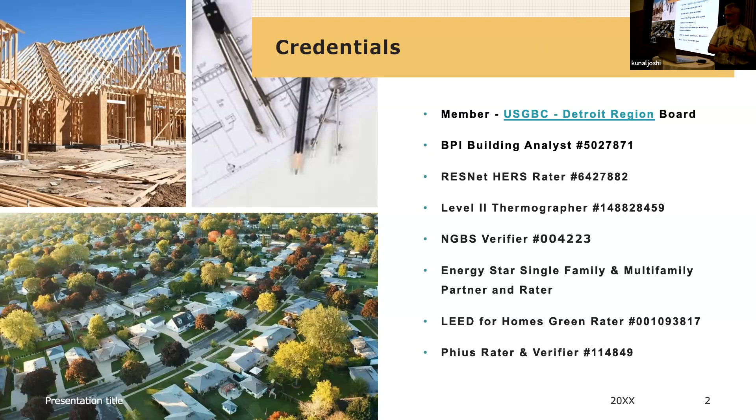All right, you're driving. Go ahead, go to the next slide.

Okay, so when it comes to energy efficiency in any building, buildings are always going to use the same amount of energy. It's just a question of how efficient the mechanical equipment is, but the energy demand is always the same in the building. There's two ways to reduce the actual energy demand in a building: air sealing and improving the insulation.

That's it. Okay. So the cheapest and most effective way to improve the energy efficiency is air seal, air seal, air seal. And if somebody tells you that you're going to make the building too tight, they don't know what they're talking about. After that, you improve the insulation, and sometimes tying the two together is the way. So you want to air seal around your insulation while you're installing or correcting things. Go ahead, go to the next slide.

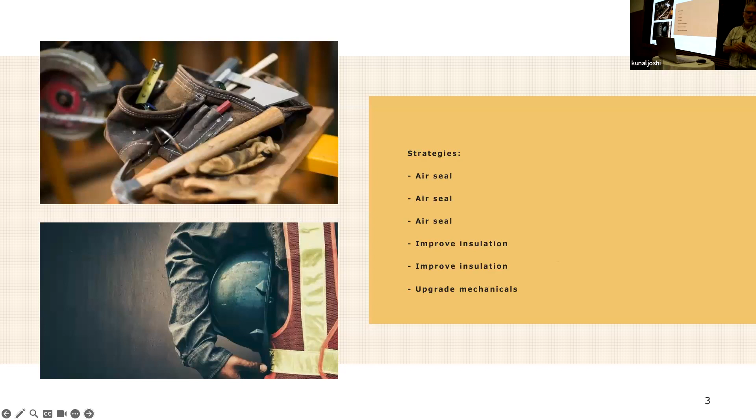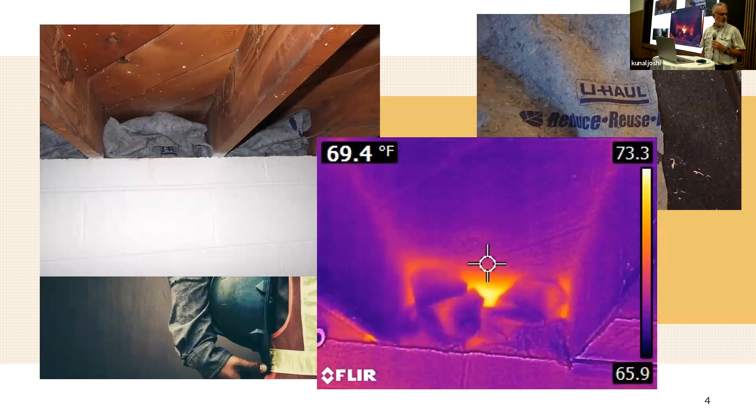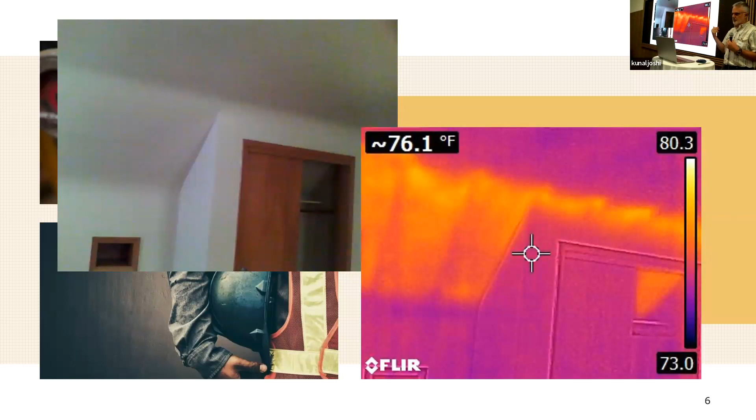So this is the sloped section of the ceiling that you see right next to that closet. The sun is beating down on that, and the insulation, because it is not installed correctly, is not doing the job that it's supposed to do. So you're going to get heat gain in that area specifically. Go ahead and go to the next slide.

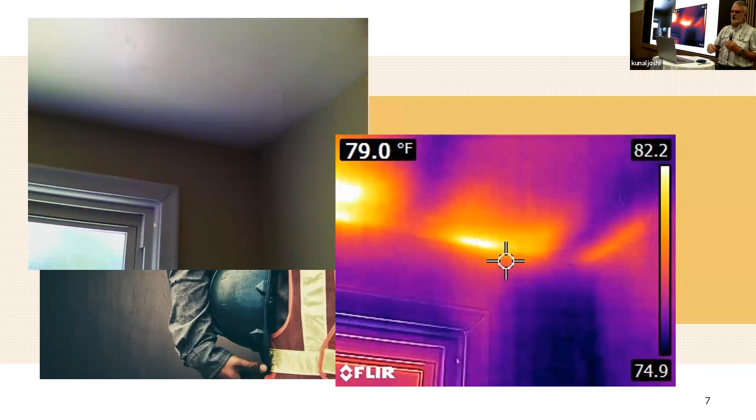And then this is a ceiling underneath conditioned space, but there is a porch roof that comes down. So we are getting air leakage in the thermal image. You can see the air leakage coming between the floor joists. So even though it's conditioned space above, you need to pay attention to what's outside. A lot of times when they frame roofs, they don't take care of the air sealing because they figure it's in an attic space. Next slide.

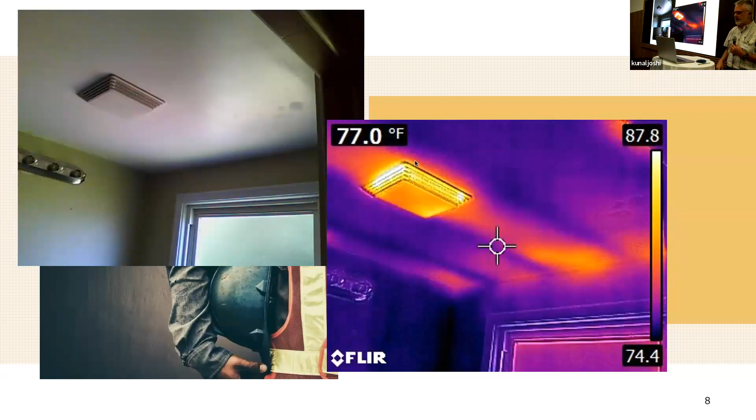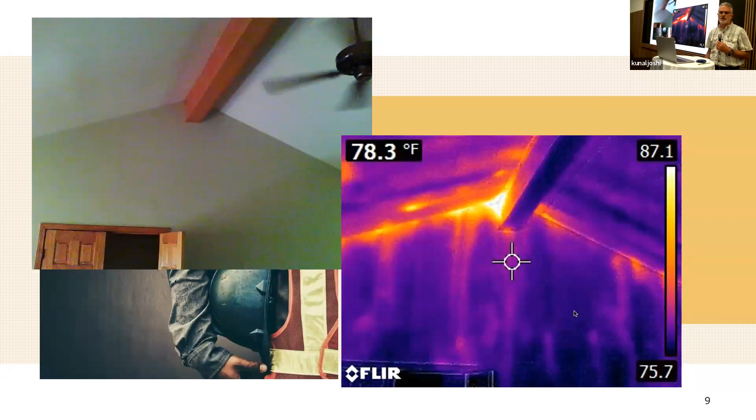And then this is air leakage. I have the blower door running here; that's what I would use to depressurize the house. When you're doing air leakage checks, you can use a box fan from Home Depot and just set it up in a door and seal around it. You don't need someone to come in with a fancy piece of equipment. All you need to do is move air out of a room or out of the house.

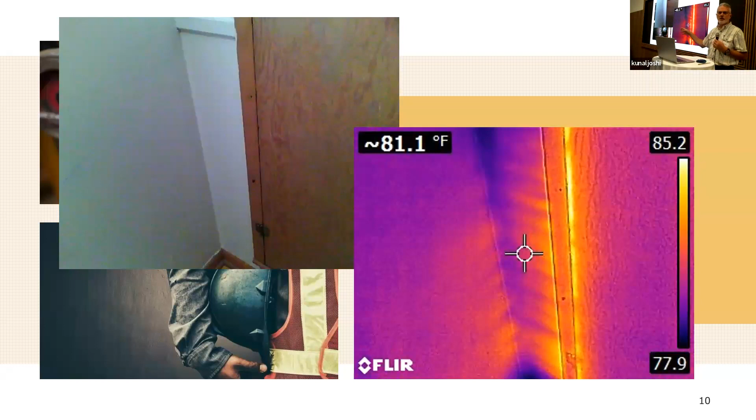So this is air leakage from an attic space through a door and around the trim. The wisp on the left-hand side is the air moving along the wall plane, and the bright light to the right of the trim is air leaking around the door and coming in. When we do a blower door test, we depressurize the house and simulate a 20-mile-an-hour wind on the house. Go ahead and next slide.

So the picture on the left is a dark paneling, but it is an interior door. In the thermal image, the dark purple right there is where the door latch catches. And so what's happening is when the wind blows on the house, or when I'm depressurizing with the fan, I'm drawing air through all of the interior walls, and it's coming out through that door. That's one of the last places that people think to look.

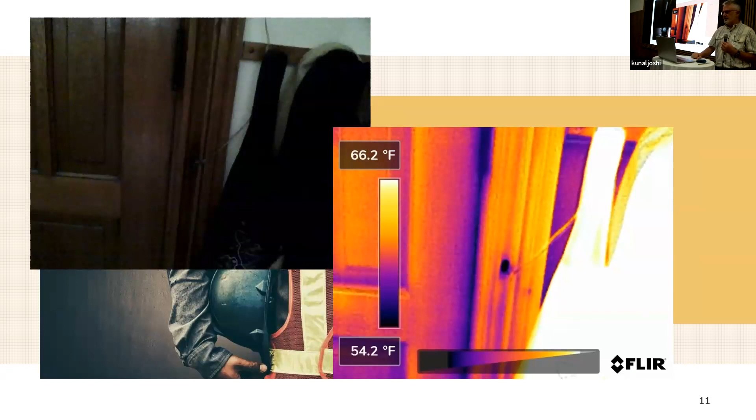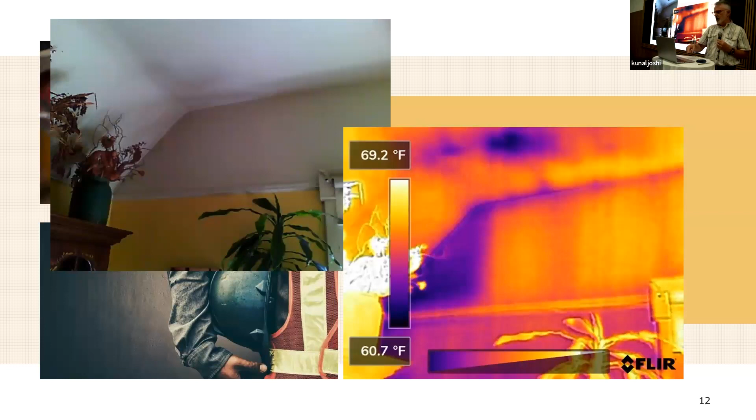Next slide, please. This is another knee wall. So you can see in the triangle on the left, we got a little slope ceiling over there. They 100% missed the insulation in that. Next slide.

And then this is another interior wall. We can see this is during the wintertime. We can see, on the lower right-hand side, a little cold wisp coming in. Again, I got the blower door running, but if the wind is blowing at 15 miles an hour or so, it's going to have the same effect on the house. So you need to pay attention to not only the exterior walls, but with air sealing you need to pay attention to your interior walls also. Next slide.

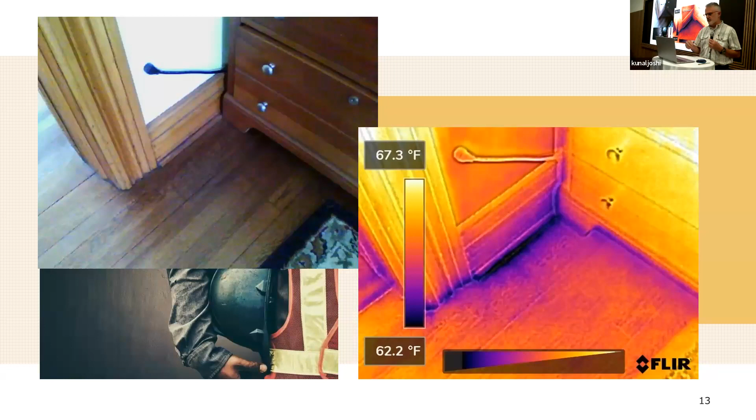And then this is underneath a windowsill. So painters, when they paint, they caulk the sides, but they never caulk the top and the bottom of the trim because you never see it. But this is air bleeding through underneath the window assembly and coming out behind the trim, the apron there.

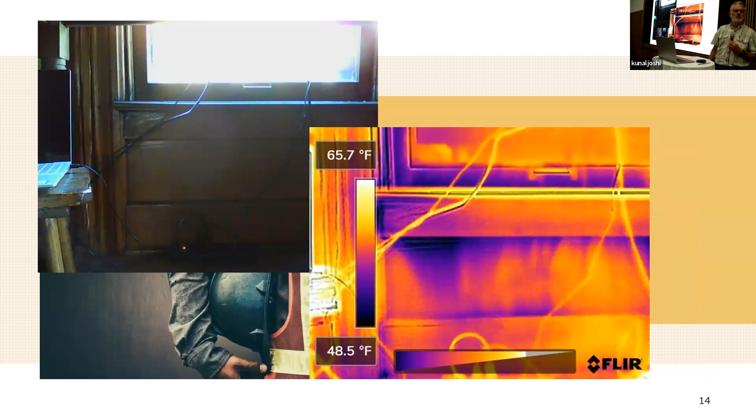How am I doing on time? Okay, next slide.

And then this is a sample. So once you get all your air sealing done and your insulation, all your upgrades done, that's the time to replace the mechanical equipment. Don't do it before. And this is a sample Manual J. I know it's kind of hard to see, but on the left-hand page there, that's a summary of what the house is going to use. And then down on the lower half of the left-hand page is a room-by-room breakdown, where it tells you how many BTUs each room needs, what the CFM should be, and so forth. And then on the right, it gives you a breakdown of your loads in the pie charts.

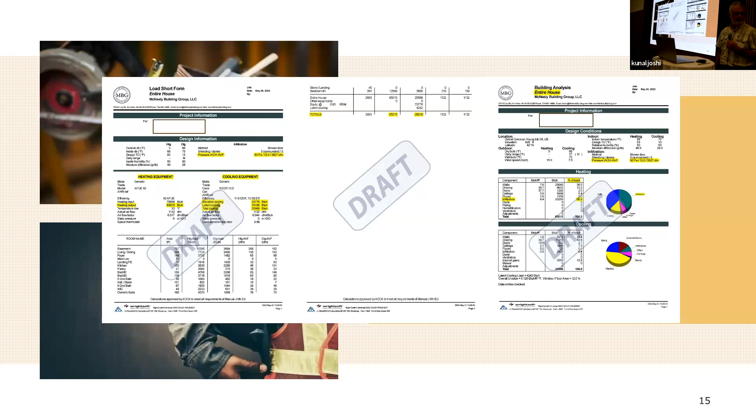This is required by code, but nobody ever does it. It's never enforced. So there's Manual J, Manual D, and Manual S. J is the loads of the house. D is your duct design. That's primarily for new construction, or if you are doing duct replacement. And then Manual S is the equipment selection. So the equipment selection is important, especially with air conditioning. There's two pieces the air conditioner is responsible for: your thermostat set point and the humidity in the house. But again, it is to reduce the energy demand of the house, not what the mechanical system uses. Two ways to do it: air sealing and improving your insulation. Next slide. And that's it.

I actually got through that. I can talk for a very long time on this. Rich told me that I had 20 minutes, so I'm like, oh, I got to get going.

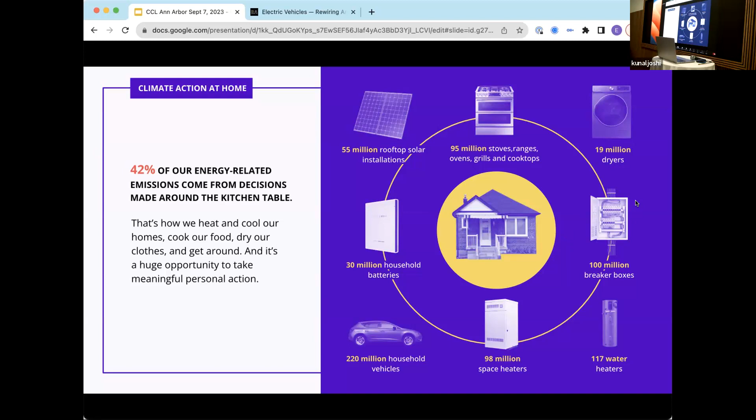This is not a new technology. They work across all temperate zones and in cold climates like Minnesota and Maine. In fact, we've seen a huge adoption in the state of Maine. They've surpassed their statewide goal of heat pump adoption. So it's really an inspiration for other states that are in colder climates and are concerned about the technology performance.

We've seen a lot of advancement in this particular space and equipment. And again, 3 times more efficient than a fossil fuel or electric furnace, heats and cools your home. So we're working with some communities across the US that do not have AC in their home. And as extreme heat becomes more and more common, we're seeing that a heat pump can provide valuable resilience benefits in providing air conditioning for those folks who are vulnerable to extreme heat.

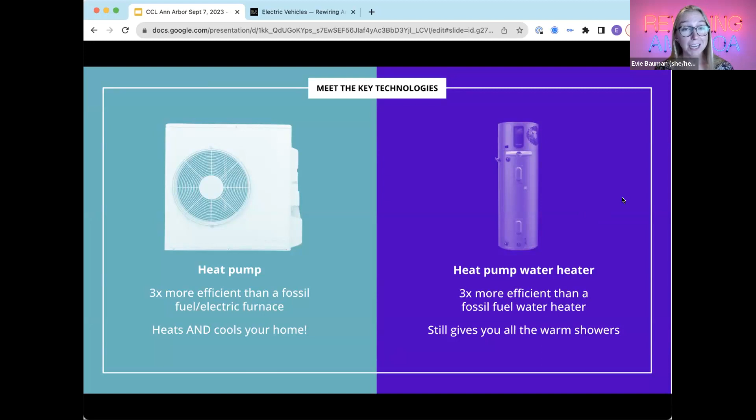Next, we're focusing on the heat pump water heater. This also is 3 times more efficient than a fossil fuel water heater, still gives you all the warm showers that you need. And it also can be a mini AC because it does provide some cool air in the area in which it's installed.

Another key technology that we want to highlight are induction stoves. These are very responsive, fast, and very easy to clean, more precise than gas stoves. In fact, they are outperforming gas stoves in every category of consumer testing. They do help improve air quality in your home, and they also avoid unnecessary heat and burns.

My parents just switched from a gas stove to an induction cooktop, and they love it. It took some time to learn about the new technology, but they're really grateful because they welcomed their first grandchild into the world about 8 months ago. And so now when Margaret comes to visit their house, there are no concerns about her going near the stove or touching anything because it's all magnetic, and there's no risk of her burning from the cooktop itself, which is really exciting.

And I also want to highlight an advancement that one of the folks who used to work at Rewiring America is focused on now full-time. He is incorporating batteries into induction stoves, so they too can serve as a resiliency mechanism in your home for when outages happen. We've heard that a lot of hesitation around switching from a gas or propane stove to an electric one is that you lose the capacity to use it in an outage if you don't have any backup power. So there are new innovations on the way that would allow you to still use your stove and plug in life-saving appliances in the case of an outage.

I'll flag it's very expensive technology right now, still in the works, but we hope that that will become available at a more affordable rate very soon. And last but not least, here on the key technologies, a heat pump dryer, also more efficient than a fossil fuel dryer. You don't need to cut a vent through the exterior walls of your home. You don't need a gas hookup. And in many cases, they don't require wiring, and they also cause less damage to your clothes.

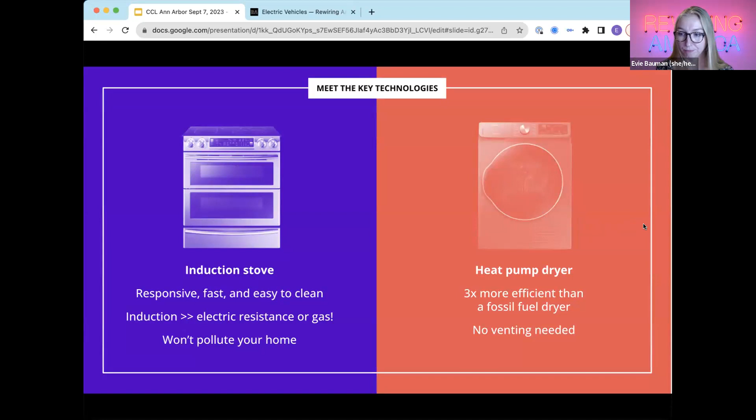So overall, Rewiring America is really focused on electrification because we see it as a story of economic renewal and community infrastructure. This is a new climate future that's possible. Electrification has the potential to lower your energy costs, but I do want to flag here that it looks different across the country. We have a term called the spark spread, which means when we're assessing what is the price of gas compared to the price of electricity, in many states, it is hard to make the numbers pencil out.

To the previous presentation, it's critical to do that air sealing and insulation work first as well to help you get there with the economics and right sizing that machine equipment. As was mentioned, I was really excited to hear the Manual J mentioned because we suggest that for everybody that is pursuing a heat pump in their home. We ask that you require your contractor to do a Manual J calculation. So really excited to see that highlighted.

But just want to flag that it can be very cost saving, especially when shifting from an electric resistance, inefficient heating system in your home to a heat pump, which is much more efficient than that, or potentially switching from delivered fuels to a heat pump. And then in many instances where gas is more expensive than electricity, you can see significant cost savings, especially when it comes to space heating and cooling.

Healthier homes, again, air pollution indoors, very much reduced, fewer asthma-causing emissions, and then the climate benefit too. We do think that we can actually zero out the emissions we generate with machines in our daily lives. And in general, drive more local jobs to carry out all of these projects to electrify every home.

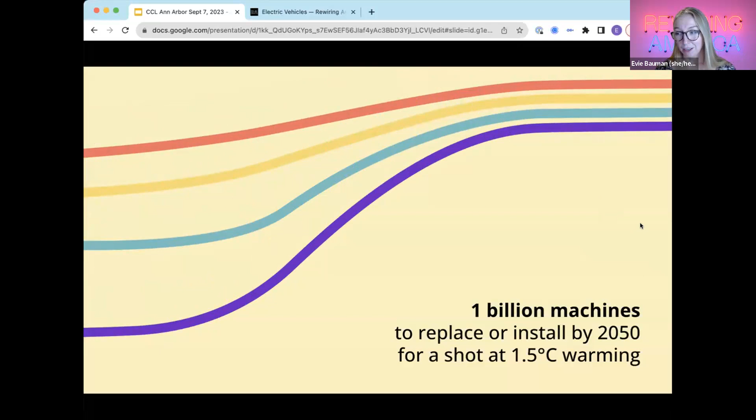So as mentioned in the introduction about Rewiring America, these kitchen table decisions need to lead to 1 billion machines being replaced or installed in order to meet our 1.5 degree warming goals. So at Rewiring America, we have done a little bit of the math, and we talk about this opportunity as the pace of progress that we need to achieve to net zero emissions from residential buildings by 2050. And we quantify the opportunity in the immediate term.

But there's great news. The Inflation Reduction Act, as mentioned, has already jump-started this movement in every community in the nation. So this law provides rebates, tax credits, grants, low-cost financing for heat pumps, heat pump clothes dryers, heat pump water heaters, electric induction stoves, upgraded breaker boxes, electric vehicles, solar, and storage. At the same time, it also has very powerful incentives for the supply side for renewable sources.